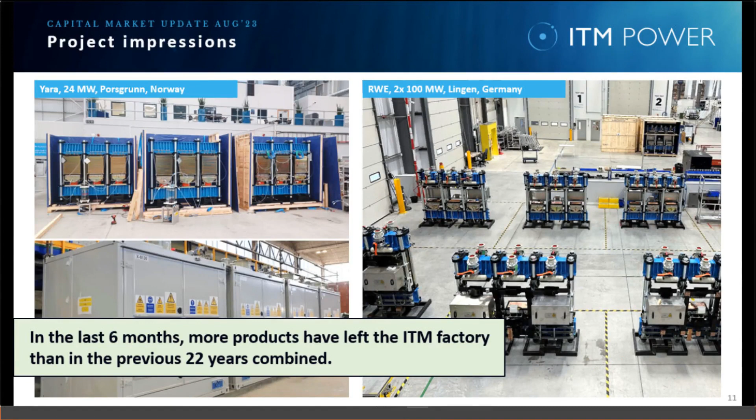Now over to you, Simon, for an update on our product portfolio.

Thank you, Dennis. I'm going to talk to you about our products, which of course are a significant component of our 12-month plan.

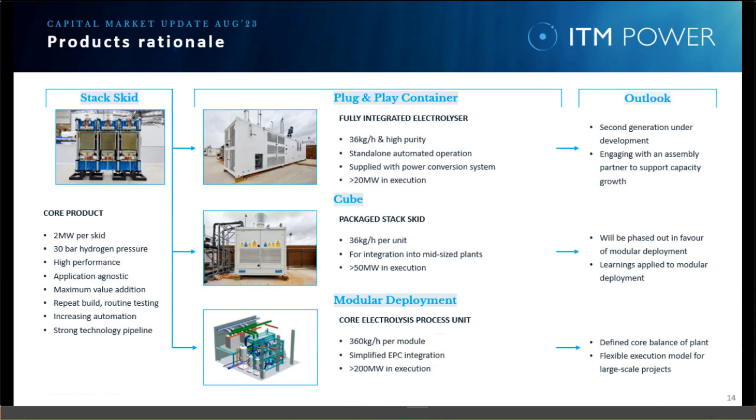Okay, so I'm now going to focus on the stack. We have the most advanced stack technology on the market. I recognise that's quite a bold statement, but I'm going to give you some reasons to underpin that claim.

There are three important metrics that matter for PEM stacks. The first is current density. The higher the current density, the more hydrogen you can make with a stack. We have the highest current density on the market, and that means we can shrink the footprint and also reduce cost.

The second is efficiency. We have leading efficiency at levelized current density. Efficiency represents the amount of energy consumed to generate the hydrogen, so clearly reducing the energy consumption reduces operational costs for the end user.

The third is precious metal loading. We have the lowest precious metal loading reported, and that, of course, directly leads to a reduction in cost.

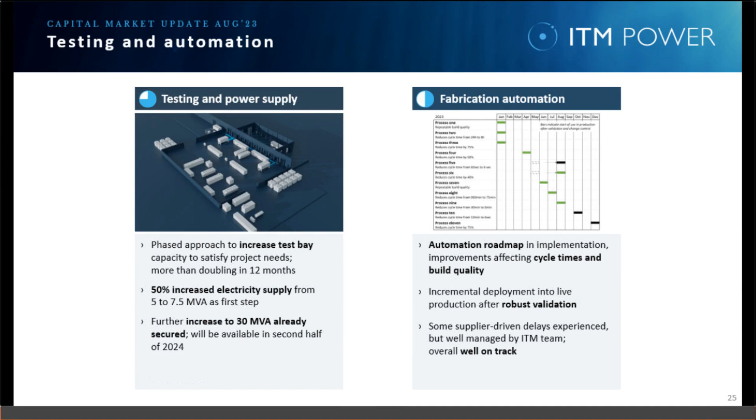I would say enough words for now. Let's now come to more visible proof of the progress we have been making on automation. And let's come to our new product release. Exceeding expectations. That's what we are here for.

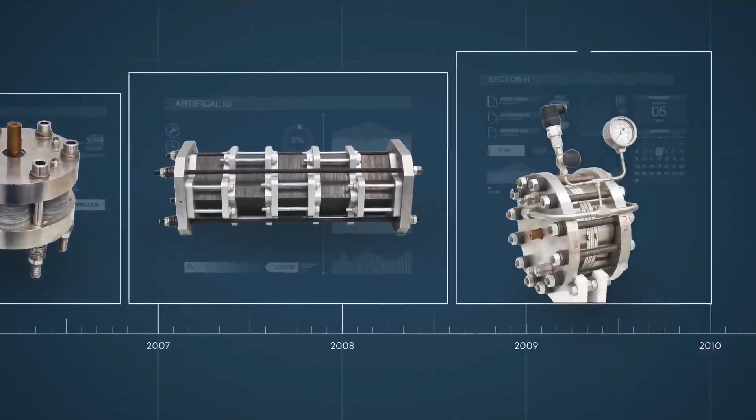After 23 years of research and development and pioneering innovation, ITM Power is offering the most advanced PEM electrolyzer technology in the market today, and now we are becoming a high-volume quality manufacturer. We have implemented new processes across the business, each of which is a substantial improvement and a step closer to achieving our automated manufacturing ambitions.

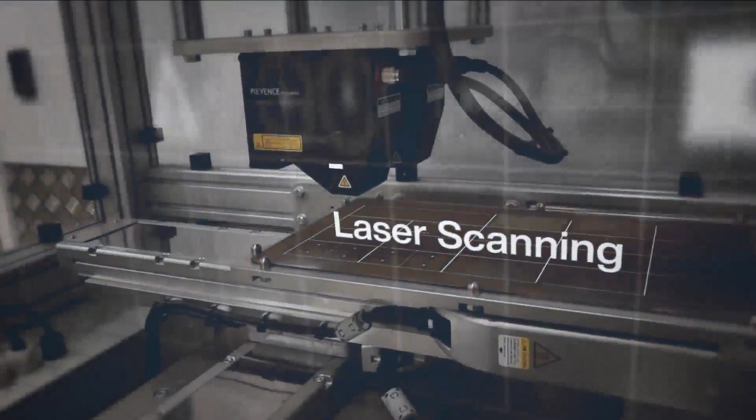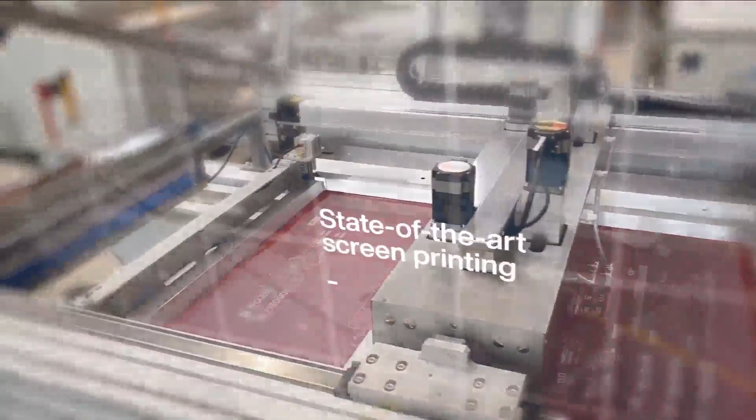Some of these processes include a customized press capable of operation at 20 tons of pressure with a micron level of accuracy, precision laser scanning, allowing us to inspect every electrode structure, a resistance welding machine developed in-house to assemble stack components with highest precision, automated catalyst ink mixing, producing consistent pastes for our catalyst-coated membranes, applied via state-of-the-art screen printing technology. Project sizes continue to scale.

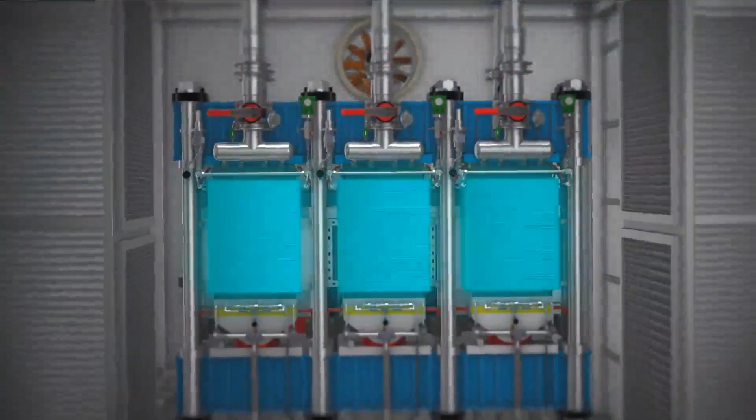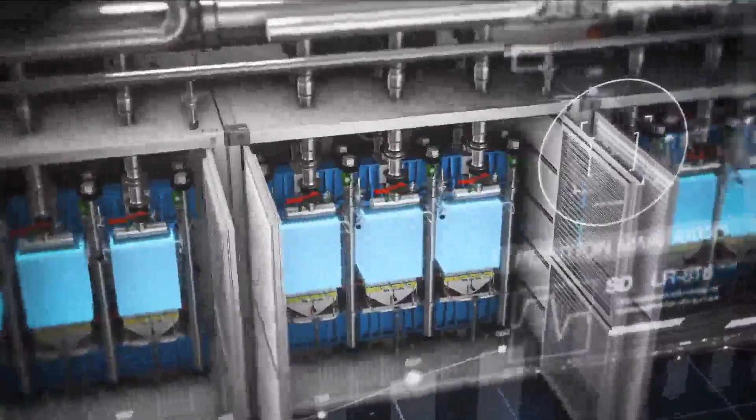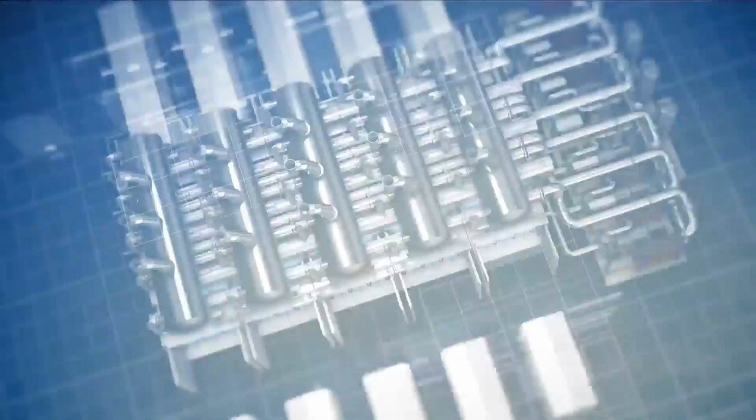ITM is responding with a new product release. Meet Poseidon. Incorporating our learnings from commercial projects, Poseidon is our new cutting-edge 20 megawatt core electrolysis process module. It is based on our state-of-the-art Trident stack platform and consists of skid-mounted units which can be prefabricated and pre-tested. Poseidon enables efficient integration of the core electrolysis process into the balance of plant. This leads to shorter deployment times and lower project costs. Poseidon is set to turn the tide on electrolyzer deployment as we dive headfirst into the race to net zero.

Well, this is what I call progress, and this is definitely a game changer for the industry. Let me repeat some of the key statements around Poseidon. Poseidon is our new standardized 20 megawatt core electrolysis process module with a very optimized footprint. It is replicated for scaling up for large projects and suitable for both indoor and outdoor installation.

It consists of skid-mounted units, which can be prefabricated and pre-tested and which are ready for road transport without additional permits. By that, we can achieve reduced deployment lead times and lower construction costs, and also de-risk customer projects. Poseidon has been engineered by ITM, incorporating real-world lessons learned from commercial projects.

Let me put it like that: if we didn't build all of these first reference plants and large projects we have been currently building, we couldn't have designed this module. The design of the module is ready for integration into the balance of plant, which is enabling flexible execution work splits for large-scale projects. And let me emphasize again, this is not just a nice render graphic. Poseidon is now commercially available, and we have started bidding into actual commercial projects with it already last week.

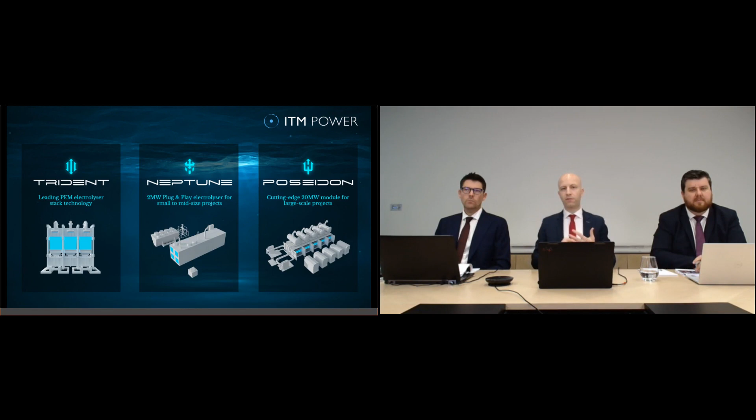Of course, thank you very much. Thank you for dialing in. I hope we were able to convey the progress we have been making over the last 6 months, which we found quite impressive, I have to say. And we are gearing up for serious scaling of our manufacturing operations and deploying products to customers, which is what we are here for. Thank you.